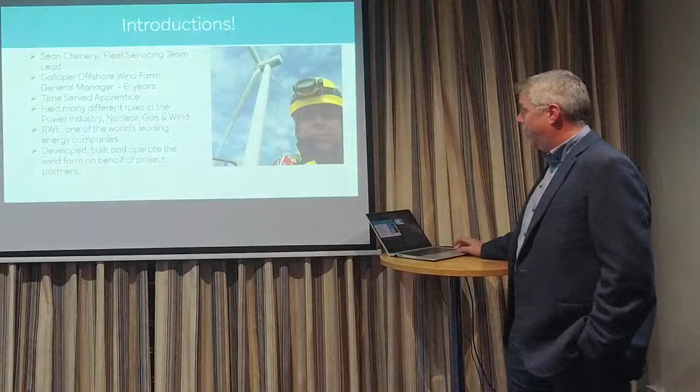Good evening, everybody. As introduced, my name's Sean Chenery. I lead a team for RWE, the Fleet Servicing Team. That's a team that travels around multiple wind farms via a large boat, and I service them wind farms. When Ian asked me to present here, he'd seen me at a previous one, I was actually the general manager at Galloper, but since then I've changed jobs. For the purpose of today, I'm still the general manager at Galloper Wind Farm, and I've been there for 6 years.

My background is engineering, so I did a time-served apprenticeship at Sizewell A Power Station on the East Coast. I've worked in nuclear, gas, and wind, and I now work for RWE, which is one of the world's leading offshore wind installers, particularly in the UK and continental Europe. We develop, build, operate, and eventually will decommission offshore wind farms.

So today I'm going to talk you through a bit about offshore wind farms, what they are, why they're there. I'm hoping that will spark lots of questions as we go through, and I'll try to address some of the issues that previous groups have brought up with regards to navigation.

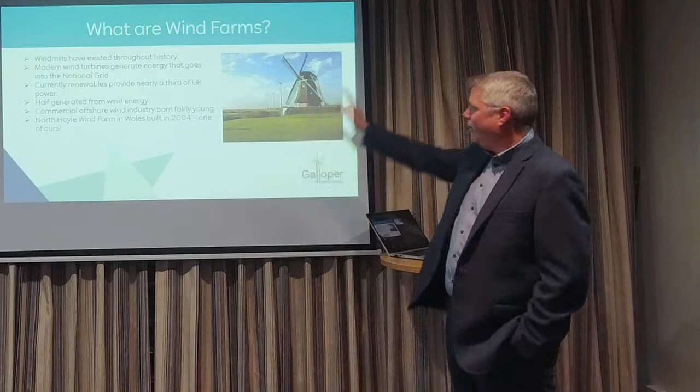So windmills, you mentioned windmills. I don't like to call them windmills. They make flour, I make power. They've existed for a long time, but the modern ones are set at sea, onshore as well.

We don't currently do onshore in my team, but we've got onshore wind farms as well, all connected to the national grid. I was talking to one of your colleagues earlier - historically, the national grid was set up with a spine down the UK, where most of the big coal-fired power stations sat, where the coal was, in the Midlands, connected to the national grid. They've all shut, apart from a few that are now burning biomass. Now we're connecting everything on the outside, coming from the North Sea and the Irish Sea, connecting to the outside, which has caused a bit of a headache for the national grid. So not only are we building our wind farms offshore, they've now got to change their network to facilitate power coming in from the extremities rather than the central spine.

Renewables make up about a third of the UK's generation at the moment. This was last year at this presentation, it's now more than that - more than a third of our generation comes from renewables, and half of that is from offshore wind. And that part is growing rapidly. You'll hear in the news today about another wind farm coming on, it's growing rapidly.

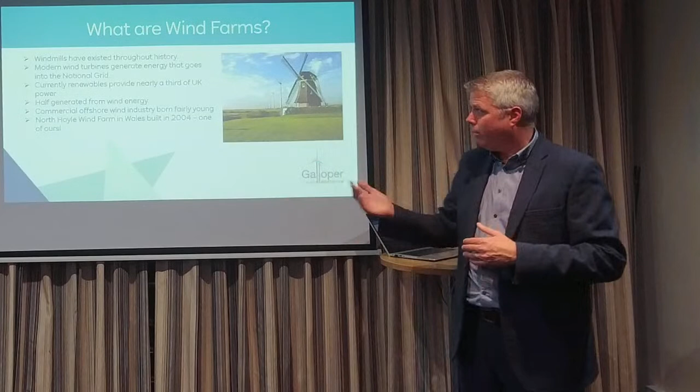The first commercial offshore wind farm for RWE was in North Wales, built in 2004. So you can see that's the very first one, and where we've come now, how many wind farms we've got. This industry has rapidly grown in the last 10 to 15 years.

Just a bit of stats - this is 2022, the next page is 23. But in the UK, the largest source of renewable energy was offshore wind. We broke records - this was a particular day in 2022, we were already 26% of UK generation, and coal had almost gone. The highest is still gas in the UK - the biggest generation in the UK is still coming from natural gas.

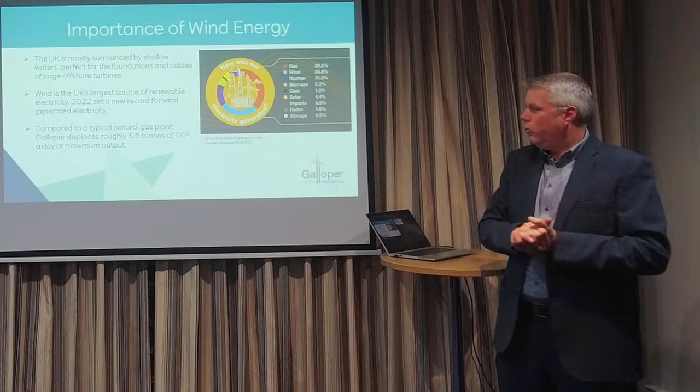Looking at our wind farm statistics - we're 353 megawatts from Galloper Wind Farm. If we had a gas-fired power station producing that power, our wind farm saves 3.5 tons of CO2 every day by displacing a gas-fired power station. So you can see that we're helping to clean up the environment. This is now 2023, so going forward a year.

Gas is still about a third, so it went from 38 to 30%. Offshore wind is now 33%. So in one year, we've increased by about 10% in the UK of our generation from offshore wind.

We're expecting that's a year-on-year 10% increase every year. By 2030, we should have 50 gigawatts of installed capacity. The UK uses about 40 gigawatts of power every day, so by 2030 we should be able to power the whole of the UK. Of course, wind doesn't blow every day, but it's a massive step forward to have enough installed capacity to produce all of our power in the UK by offshore wind by 2030.

A little bit about Galloper Wind Farm. We are 27 kilometres offshore. Around 380,000 homes are powered by just that one wind farm. We've got 56 turbines out there, which can power around 400,000 homes on any given day should the wind blow. We've got two export cables connecting all the turbines together, and they come ashore near Sizewell, connecting to the national grid. The water depths out there are 27 metres at the shallowest point and 36 metres at the deepest.

No, these are all steel, not concrete. There are concrete foundations elsewhere, like London Array, which uses concrete foundations, but ours are all steel. The later design turbines now being built on Dogger Bank and various other places are 15 metres in diameter, and water depths we're working in are typically up to a maximum of about 50 metres at the moment.

Much beyond 50 metres, we have to go to floating foundations. I'm not an expert on those, but we're now working on projects not in Scotland, since we didn't win any of those, but in continental Europe and America. Our Gulf of Mexico project is over 150 metres of water depth. Basically it's either a concrete or steel structure that sits under the water, concrete floats, and then it's chained down to the seabed - tethered by long chains.

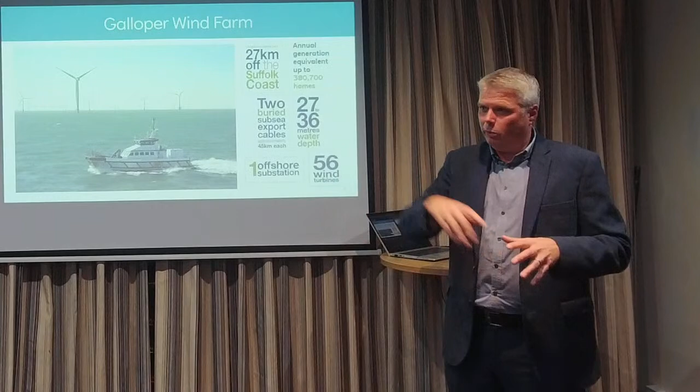But Galloper is what we call fixed bottom, a solid foundation hammered into the seabed. Before we install it, we find the location where we want to put the turbine, dump a load of rock on the seabed, and then hammer the foundation through the middle of the rock. The reason the rock's there is to stop scour. Since we're built on London clay and sand at Galloper, if we didn't put the rock down, within 5 years the sand would erode the foundation and we'd be replacing turbines.

A 5-year life is not long - no, we've got a 25-year life on it. So basically we go along, dump rock on the seabed, hammer the foundation through the middle, and then build the turbine on top.

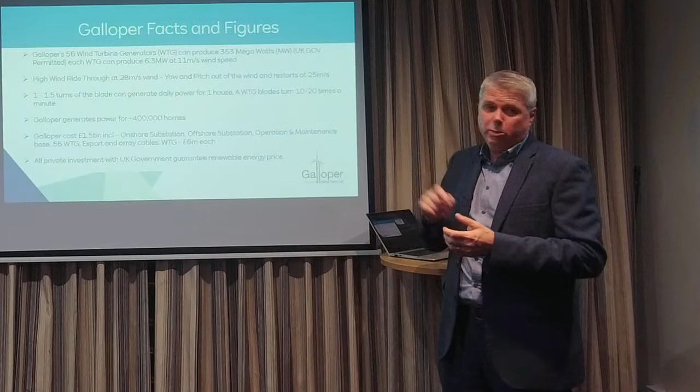We've got 56 turbines, 353 megawatts, producing 6.3 megawatts at 11 metres per second - that's the optimal speed for maximum generation. Each turbine runs all the way from 3 up to 27 metres per second, which is about 52 knots, and they can run up to 28.

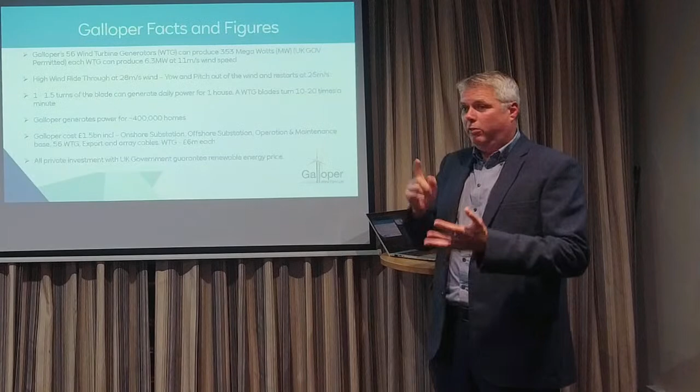At 28, the blades pitch so they're not catching the wind, and they turn themselves out of the wind. They do that automatically - they've got an anemometer on them, they figure out the wind speed, and sort themselves out. Some turbines are shielded by the one in front, so they don't get as much wind and don't need to stop and turn themselves.

Each blade revolution - so 1.5 revolutions of our blade - is enough to power a standard 4-bedroom house for a whole day.

So that's quite a lot - just 1.5 times that thing rotates around, that's enough power for a house for a day.

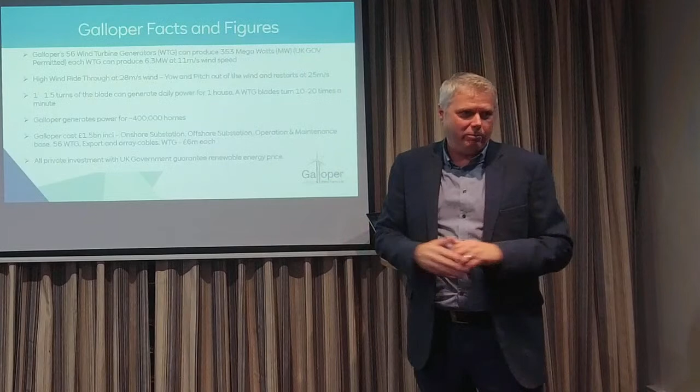The ones at Dogger Bank, I don't know if you guys saw it in the news, that was installed today. They're twice the size of ours - one revolution powers 2 houses for a day.

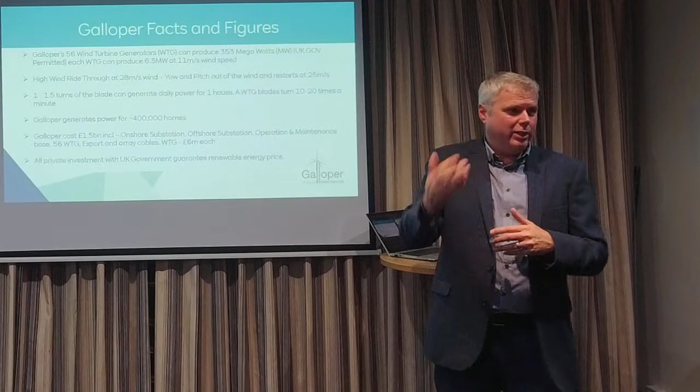So it's significant numbers. It cost us £1.5 billion to build our wind farm, quite a lot of money. We are debt financed - most wind farms built these days are either joint venture or debt financed, so they need this constant level of income to come in.

Of that £1.5 billion, each turbine costs around £6 million. Ours were made so the blades were made in Hull, the metal structure was made in Belgium, but the turbine itself was made in Denmark by Siemens.

Where are we? 27 kilometres offshore, straight out from Harwich. Our export cables come out the top of the wind farm and trundle up towards Sizewell.

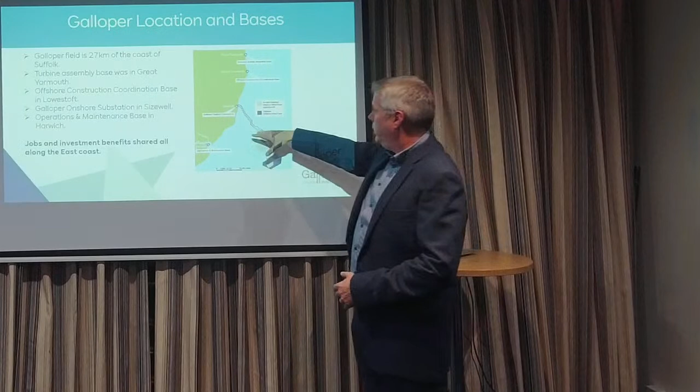When we built it, we had our construction centre in Lowestoft, and our turbines were assembled in Great Yarmouth. We ship all our parts there in bits - the turbine comes in lots of blades and they build them up on the quayside in Great Yarmouth. They stand them on the vessel, take it out and install 6 turbines at a time, taking 24 hours to build each turbine.

So just a bit around RWE as well - it's not just about Galloper. We've got a whole array of wind farms around the UK ourselves. All the green ones, you probably can't see them, represent our operational wind farms.

We're now working on Sofia, which is Dogger Bank. Those turbines are 15 megawatts, so twice the size of the ones we've got. Ours are, what, 180 metres to the tip - Sofia's are 280 to the tip.

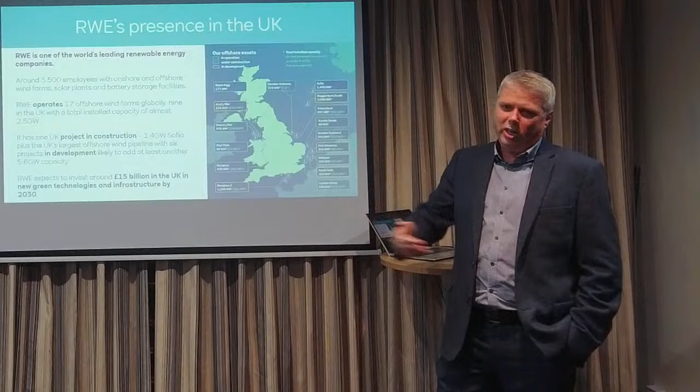The ones we're now looking at - 5 Estuaries, North Falls, the extension projects to Galloper - we're looking at 400 metre to the tip turbines, so 20 megawatt turbines. And also down at Rampion on the south coast - Rampion 1 is already off the coast of Brighton. We're looking at Rampion 2, an extension going south and west of Rampion, with similar size turbines, so 300, 350 metre turbines. You can see the advancement, the growth, the scale has just grown massively over the last 10 years.

So yeah, the one we're now working on is Sofia, the one we've just built was Triton Knoll. We're constantly building around the UK.

We expect to invest around £15 billion in the UK by 2030, and that's just RWE. You've got the big players like Ørsted and Vattenfall and Falck, all the other guys also pumping money into the UK. So lots of money.

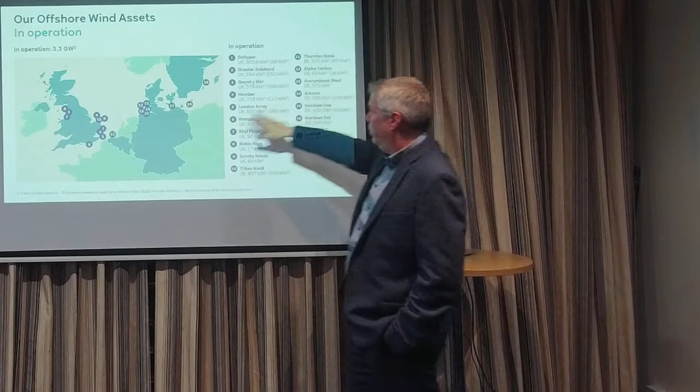It's not just about the UK - we've got all these wind farms in the UK, but we also operate wind farms in Germany, in the Baltic, mainly around Helgoland in Germany. We've got a couple of wind farms in Sweden and Denmark too, but that's our operational fleet. At the moment RWE is really focused on the UK and continental Europe.

We are now expanding into APAC and America as well - we've just won a number of auctions in America. America seems to be really galloping on the heels of the UK with regards to offshore wind.

These are the ones in development - we'll talk about the operational ones. So Rampion 2, for you guys, is on the south coast.

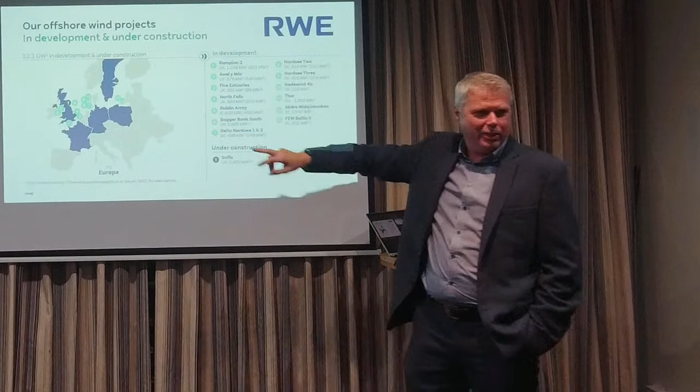Awel y Môr is in the Irish Sea. 5 Estuaries, North Falls are on the east coast. Dublin Array is going to be our first wind farm in Dublin. There's a place in Dublin where everybody has their wedding photo taken - our wind farm will be right behind it. It'd be lovely, just different.

So we're building in Dogger Bank as well - we're building Sofia at the moment. Dogger Bank South, just south of that, is going to be twice the size again, so 3,000 megawatts. And then we've got a whole load in Germany and Denmark that we're also building at the moment.

Thor is our next one in Denmark that we're now starting to build. So you can see there's a huge amount going on, lots of offshore wind coming for the future.

There's this wall of wind farms you're going to have to sail through. But there may be a misconception - you can sail through them, there is no exclusion around them. Gabbard, our first wind farm, when first built, the MMO gave us a 50-metre exclusion zone around every turbine. Galloper's come along, we've got no exclusion zone.

So all wind farms built now, you can sail right up to them. It's a good thing for fishermen, because if all of these were built and every single turbine had an exclusion zone, we'd be wiping out a huge percentage of available fishing ground. So fishermen sail right up to our turbines - in some cases they've got to put their red paint on my turbines. But yeah, they can sail right up to the turbines.

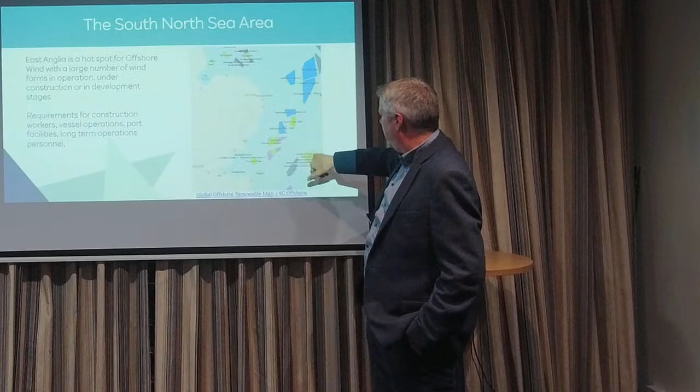You can see mainly on the east coast there's a huge expansion. The blue ones are in development, the green ones are operational, and the pink ones further out are developments that have just been put on hold - there's issues around commercial gain from those wind farms, so they're on hold at this moment in time. Might be somebody in the room that knows about those.

So these are North Falls. North Falls is this purple bit on the inside of Greater Gabbard, and that's where we're trying to extend. These are just two extensions to the existing - these two are the existing, and these are the two extensions. We're looking to double what we've got - double Gabbard into here, and double Galloper.

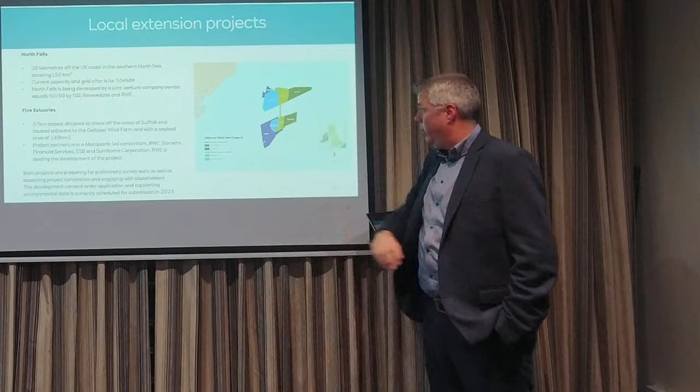Five estuaries - one of the things is this traffic separation scheme that runs right through the middle of our wind farm, so we're clearly not allowed to build in there. One thing we're having to consider is lots of shipping doesn't go through the traffic separation scheme - it comes around the top, and the natural shipping route is to cut this corner. So we're in discussions with lots of stakeholders around whether we can build out here or not, because apparently it's going to cost them billions to go further around, and maybe there's compensation involved. But fundamentally, that's what we're doing at the moment - looking at where we can possibly build our future wind farms.

So what are the turbines? As I say, 6.3 megawatts, tip height 180 metres. We've got 56 turbines, made by Siemens Gamesa. The blades are fiberglass, the structure is steel. The bit on top that everything connects to is called the nacelle - that's made of fiberglass as well. The older turbines are made of steel; ours are made of fiberglass.

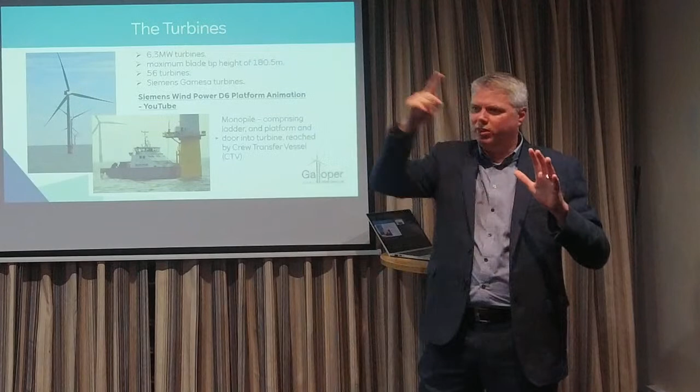It's a direct drive, so there's no gearbox, no big oil or anything in our turbine. These are the latest design. They're a permanent magnet generator, so there's no exciter or anything in there. There's 90 magnets - if you think about a normal generator that's got a north and south pole rotating at 3,000 RPM, these things rotate really slowly, but they've got multiple magnets in. Therefore you don't need an exciter or anything else, and you don't need a gearbox.

Previously, Greater Gabbard wind farm, 3.6 megawatts, has got a massive gearbox in it that takes the low speed of the blades through a high-speed shaft through a gearbox into a generator. The latest design does away with all of that, making them a lot more efficient with less maintenance. We only have to maintain these things once a year, so generally we go out to the wind farm once a year to do maintenance, if they're in the run.

So the monopile is this here - I talked about this steel tube being hammered into the seabed, so that gets hammered in. This was called a transition piece.

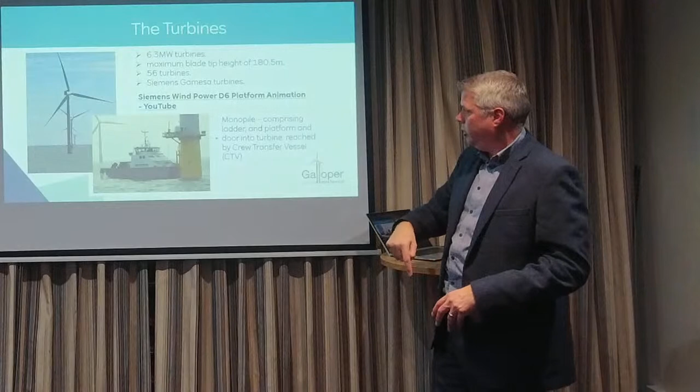This is then plopped on top and bolted on, so the monopile sits underneath this. That's bolted to the monopile, and then the tower, the white bit, is bolted onto the top. This has our boat landing.

So the vessel comes along, trundles out to the wind farm - I call it a very expensive taxi to get my techs to work. So they come along, this boat pushes on, there's a rubber fender on the front of the boat.

And as it pushes on the fender, it obviously does this - the rubber warms up and it just sticks. So the boat comes along, pushes full power basically, and it warms up, it sticks. And then the guys just step across and climb the ladder.

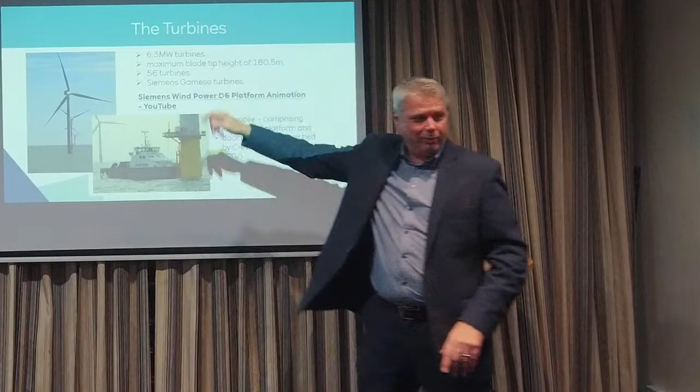There's a little bit more to it than that - there's a self-retracting line, so there's a safety line. They come up, grab the line, hook on, and then climb the ladder. The reason for that is if a rogue wave comes, it might not stick, so they're always hooked on as they do the transfer. It has been known on various different wind farms that this does let go every now and then.

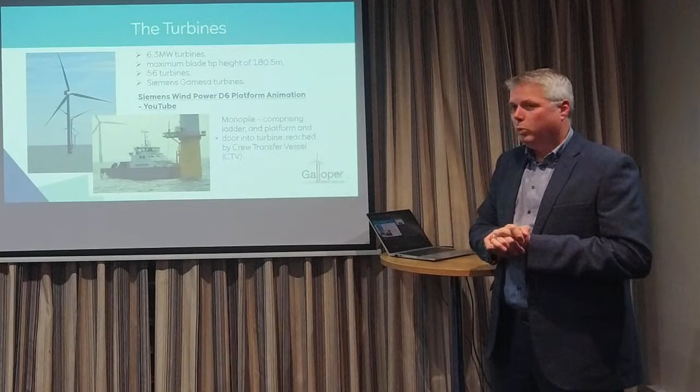These boats are capable of sticking to the turbine up to 1.7 metres significant wave height, so it has to be fairly rough for these things to fall off. Generally the technicians are being sick before we get there, before we want to transfer them. They've got about a 90-minute journey from Harwich to the wind farm every morning at about 24 knots, so on a rough day it's not very nice by the time you get there. But yeah, really capable vessels - we've got 3 of those at Galloper at the moment.

Talk about this - there's the nacelle. So this is the nacelle, it's got all the gubbins in it - electrical converters, hydraulics, and all the blades are pitched by hydraulic motors, and electrical motors yaw the whole thing. We've got 37 electrical motors that turn that thing round at the top.

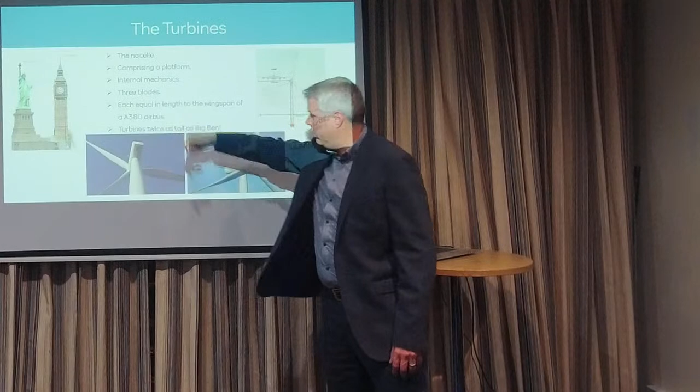All the equipment is lifted up through a little hatch under here. So when the guys go to maintain it, they climb up the monopile - there's a lift in here, takes about 3 minutes to get there in a lift, about 40 minutes if the lift's broken, because you've got to climb 100 metres on a ladder. Then when you get up there, they open this hatch, a little crane comes down, picks the equipment up off the TP, and then they take it up and maintain the turbine.

We originally had a helicopter at Galloper. After 2 years, we realised that the boats we use now are far more capable than we ever thought in the design. The cost of the helicopter, the helipad, and the training we need for our technicians just didn't outweigh or compensate for the fact the availability of the boats had got better. So after 2 years we ditched the helicopter because we can get to them by boat basically.

Quite clever technology - the blades we've just installed at Kaskasi, which is similar to this but 9 megawatts, our German wind farm off Helgoland, are recyclable blades. They're fiberglass, but made so they're fully recyclable. The polymer used to stick things together - you basically dump it in a bath full of chemicals, and it dissolves all the resin, and then you can reuse the fiberglass once you take it off. One of the biggest things about offshore wind, you've seen in the press, big fields in America where they're bulldozing fiberglass blades into landfill, but they're very different at Kaskasi with these recyclable blades.

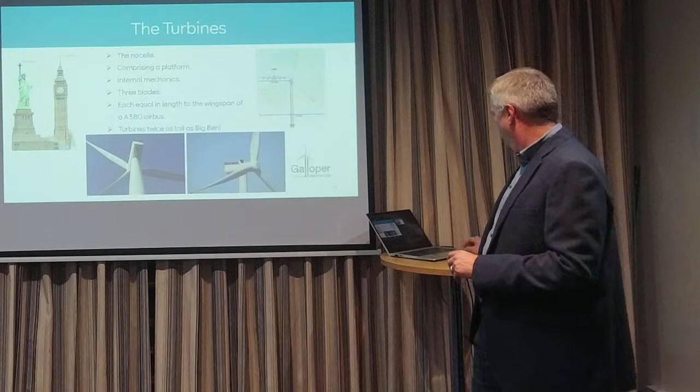Imagine the wind going down this way. I've talked to somebody about which side you should sail from the turbine - this side, don't get them stuck on the other side. Basically, we've designed the wind farm so they're not in straight lines anymore. London Array are in straight lines, but some of the later wind farms are designed so they're not. We look at the predominant wind direction and understand where that's going to come from.

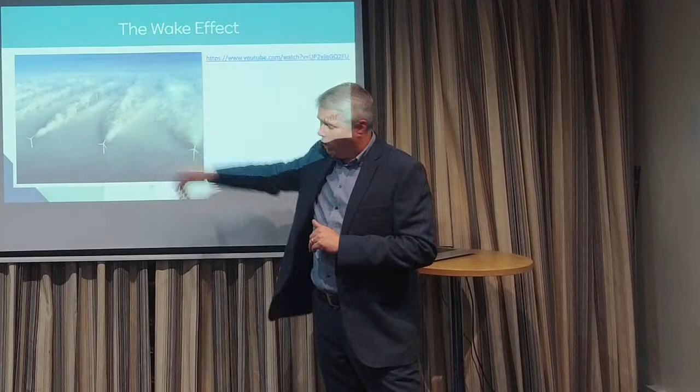This is a new piece of technology Siemens have come up with. These turbines are in straight lines, but they've got software that looks at the wind direction, looks at how much power this one is being starved by that one, and it will automatically yaw that one by 15 degrees. So the wind hits this and the wake goes over there, and the same up the line. It constantly looks at it and moves the wake of the turbine out of the way so it's not impacting the next turbine. You get about 15 to 20% more power on the wind farm just by putting this software on.

There's a sweet spot, because imagine you've got your turbine with these fiberglass blades, and the wind is trying to push it, and you're trying to divert that wind over to the next one. There's quite a lot of stress on the tower and on the blades, so there's a bit of a sweet spot on the angle you can try and move that wind.

Construction-wise, this was in Great Yarmouth, where we bring all these components in singularly. We put the towers together, fit them out, and do as much work on shore as we possibly can, because it's not hugely safe offshore - it's a lot safer to do it on terra firma. So we do all of that work on shore.

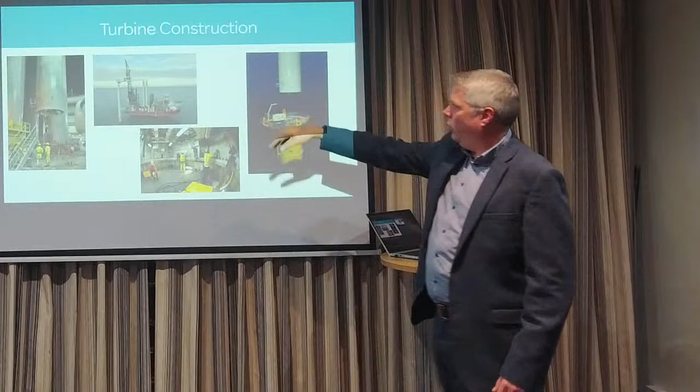It's got jack-up legs, so it sails out, puts these legs on the seabed, and lifts itself out. There's a stable platform, and then it uses this crane to grab hold of the equipment and put it on. We can build and commission a turbine in 24 hours. That thing comes along, jacks up on the seabed, puts the tower on, puts the nacelle on, puts the blades on, connects the cable, takes the jack-up away, moves off, commissions it, and goes to the next turbine. That's only made possible by doing all of this onshore.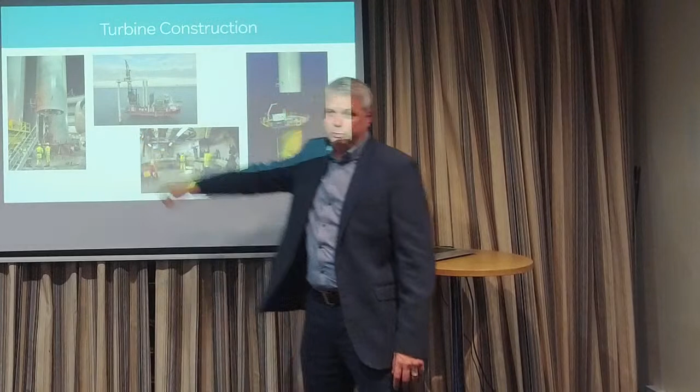This is the guys inside. This particular turbine has about 136 bolts around here, M48 I think, and they're basically torqued down as they go around. This doesn't stop at night - we do this 24 hours a day, and we've got very good crane operators from Siemens doing that.

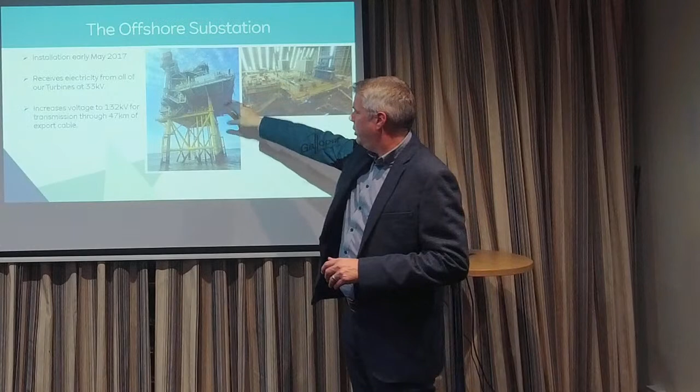So it's not just about turbines. We have an offshore substation, 1,600 tonnes, with 2 big transformers that take the power from 33,000 volts to 132,000 volts and send that to shore. All the cables that come from the turbines run up through these little tubes, and the ones on the far side are the bigger ones that take the export out.

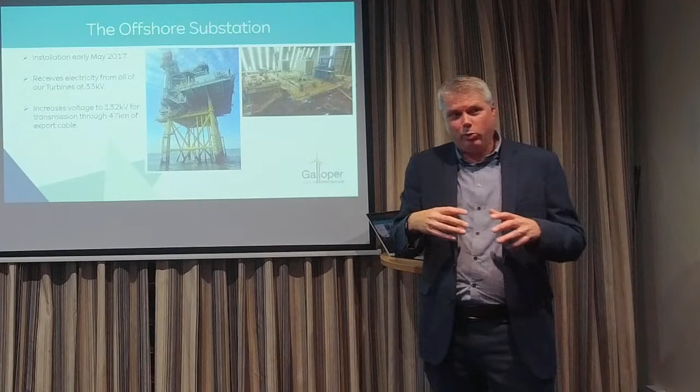We build this as a construction company, but as an operator we're not allowed to operate the transmission network as well. There's a process in the UK that doesn't exist in any other country, where you have to have a second party that runs the transmission system - called an OFTO in the UK. So you build it, commission it, then sell it to somebody else to operate for the next 25 years. That takes the power from the turbines, steps it up to make it more efficient, sends it down those cables and connects it to Leiston.

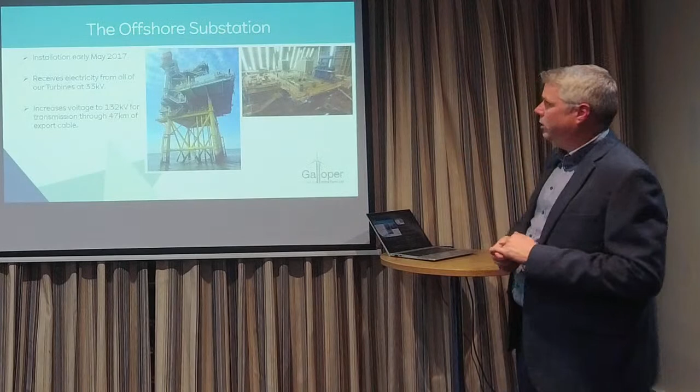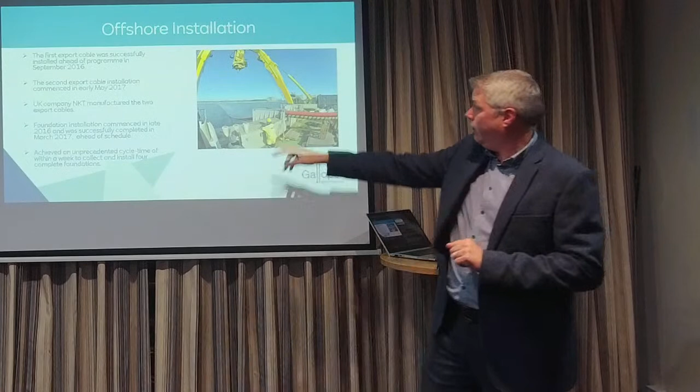This is our cable vessel - we pull 2 export cables in, one one summer and one the next. This boat has a big carousel with the cable on it, that's the stripy bit. It reverses as far as it can towards the sea, then a little tug takes a plough on the back, trundles it, and dumps it on the beach. You then put the cable in it, and the boat pulls that plough and ploughs the cable into the seabed 2 metres deep.

So my life is not about generation, my life's about logistics - when I can get a boat out there, when I get people out there, do I get the right tools. It's generally not about the generation side of the business.

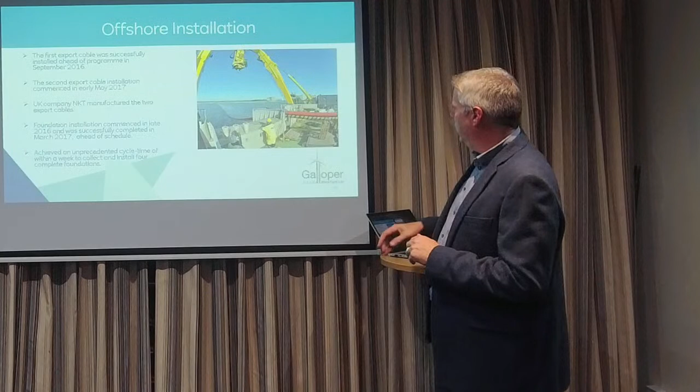Bearing in mind we want to look after the environment and visual impact, so we dug a big hole and all the spoil we created we put on the berm. So if you ever go to Sizewell Beach - hardly anyone does - you'll never be able to see this because we sort of buried it in the environment. And we've got lots of equipment there that takes the power and cleans it all up.

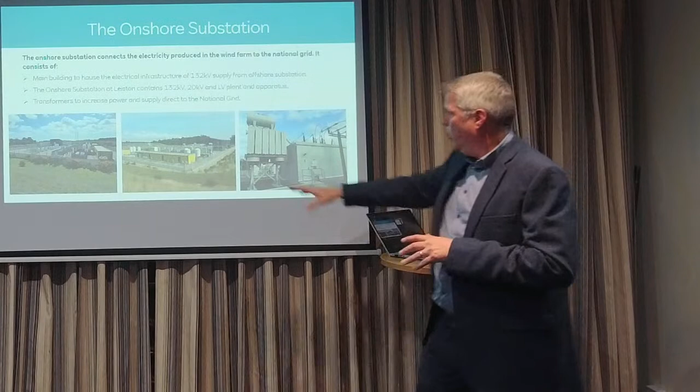Offshore wind, the power generated isn't particularly clean - it's got some harmonics associated with it. We've got lots of filtration and capacitors and reactor banks, cleaning all the power up before it's connected to the national grid. So basically in this building is where it connects to the national grid, but all of the stuff outside is cleaning and filtering the electricity to make sure it's good enough to connect to the national grid.

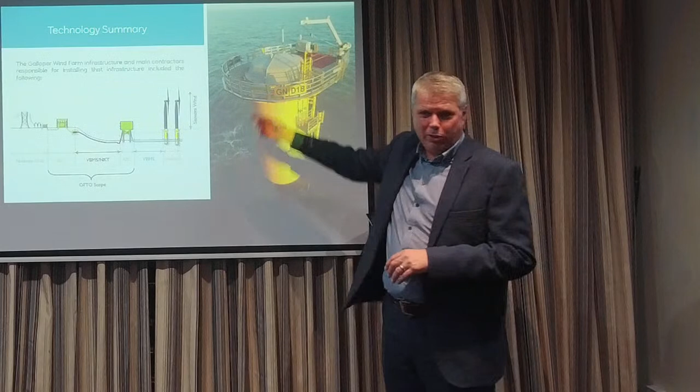So fundamentally that's what it is. There's the monopile on, so Galloper North, Delta 1 Bravo. So if you see GN, that's our north field. We've got Galloper South, and GS is the one below the separation scheme. Each wind farm will have exactly the same thing, so if you're ever lost and you look at the numbers, hopefully you should be able to see where you are, as long as you know what the number means.

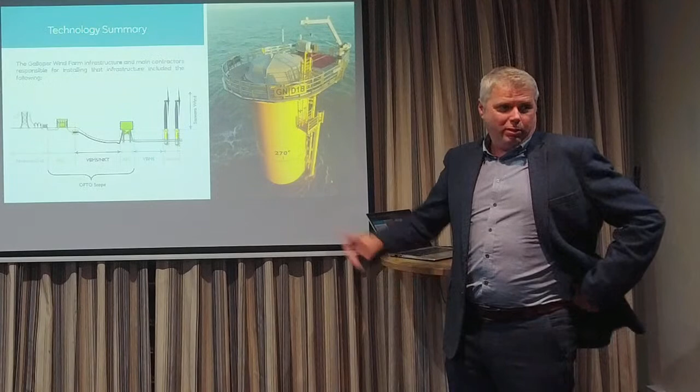And all of these point to, on the side of all our turbines, it tells you where the cables are. So on ours, if you sail up to it and you've got Alpha 1 Alpha to Bravo, Delta 1 Bravo, that means exactly where that line is, where the cable comes at the bottom and goes off to the other turbine. All the latest wind farms are doing that now - they never used to, but that's great for other people, fishermen and all that, to know exactly where the cable's coming up the turbine.

It's buried though, isn't it? It's buried 2 metres. I'll show you later on - there's a bit of a problem with that.

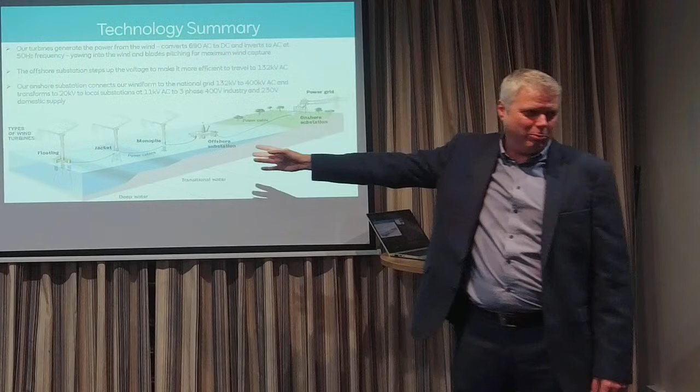So this is - oh, I like it, nice little picture. So we use monopiles, so we're in relatively shallow water, say up to 50 metres. 50 metres to about 75 metres is jacket foundations. And then when I talk floating foundations on the far left, that's when you get really deep water and you can't put that steel structure into the seabed. That's a pretty good picture of everything.

We've got an O&M base in Harwich, a state-of-the-art facility. I've got 60 odd people working in here. We've got pontoons, so a purpose-built pontoon, with 3 vessels.

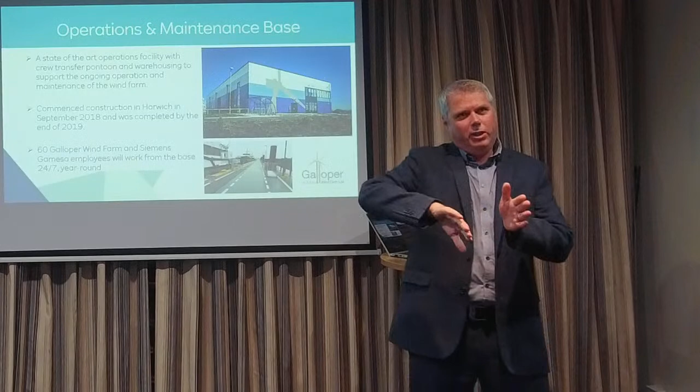So the wind farm actually got built before this because of brent geese. Harwich has got, so where we are positioned in Harwich, we've got a triple SI that side and an SPA that side, so we had to do lots of bird surveys. One of the reasons the helicopter was a problem is I couldn't have a helicopter at Harwich - I had to then use an airfield at Great Oakley because of, I forget what bird it was. It wasn't a bird actually, I can't remember what it was.

But it's not just the wind farm that we have to worry about for the environment, it's the O&M base and everything else that goes associated with it. We've got 60 people working in this location.

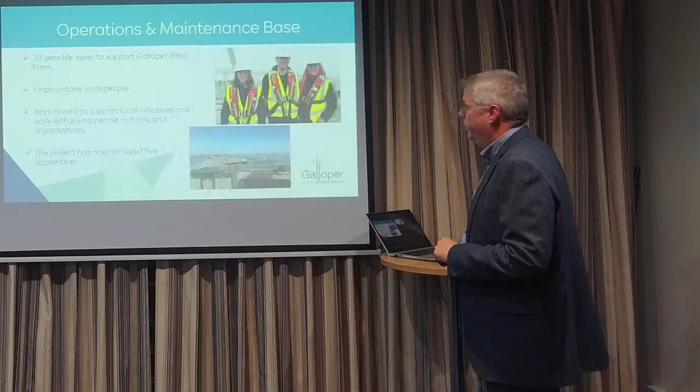We're there for a 23-year life. We employ lots of people - these are our apprentices in their first year. We've now had 7 or 8 apprentices go through the scheme at Harwich. This is our pontoon, our link span. We've got 80% of our employees living within an hour of Harwich or employed within an hour of Harwich. And like I say, we've got this massive apprenticeship scheme that we take people on as well.

RWE takes on 18 apprentices every year across the whole of the UK, and that's only getting bigger. We can't get enough, basically. And we've got graduate schemes and all the other schemes that you'd expect us to have.

Like I say, 90 minutes from Harwich on our boat. This is a guy who's got off here, basically climbed up. There's a self-retracting line there, so as he gets to the front, he grabs the self-retracting line, hooks himself on, climbs up here, goes over, and then gets to work.

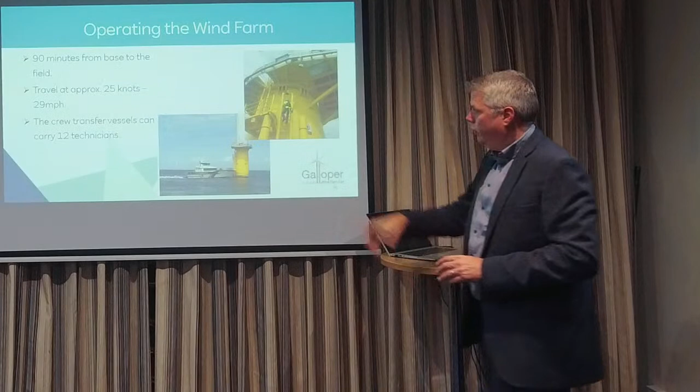The vessels are catamarans, jet boats or CPP, two different types. Jet boats are more manoeuvrable, but tend to fall off the turbines a little bit easier. Propeller boats are less manoeuvrable, but once they're on, they seem to have a better stick onto the boat in front. Each one takes 12 technicians. We've just procured a boat at Galloper to take 24, so these are generally 24 metres by 8.

The new best vessel is in build at the moment on the Isle of Wight. It's 27 metres long and 10 metres wide. So they're getting quite big, these boats, and quite expensive. What do we do to the wind farm? I've got some more pictures of this in a minute, but we've got people hanging on blades.

We're in a harsh environment - wind, rain, snow, ice, birds, everything else thrown at these blades - and lightning is our big issue. We've had a huge amount of lightning this year. So in the winter we can't get to it because of the wave height, and in the summer we can't get to it because there's loads of lightning. So we always need people to go and repair them.

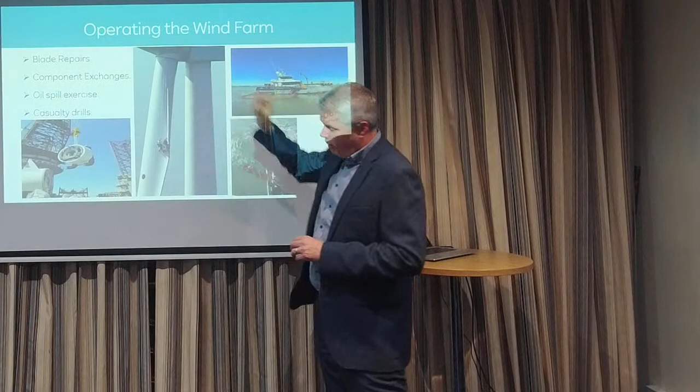We do all of our inspections by drone. We can get around the wind farm in a week, basically - every blade inspected within an inch of its life, photographed in the database, all remotely. Nobody goes on a blade. In basically a week we can do that. Then when we get those pictures back, we look at them and decide what needs repairing. Fundamentally we have to send somebody out on a rope to repair it - we haven't figured out how to repair them remotely yet.

Just a picture of us doing some exercises. Every 3 months we have to do spill exercises and casualty evacuation. So this stretcher has just come down from the hole at the back here - there isn't a person in there, no, that's a dummy. But you can imagine, in some places in the wind farm we're circa 2 hours away from medical care.

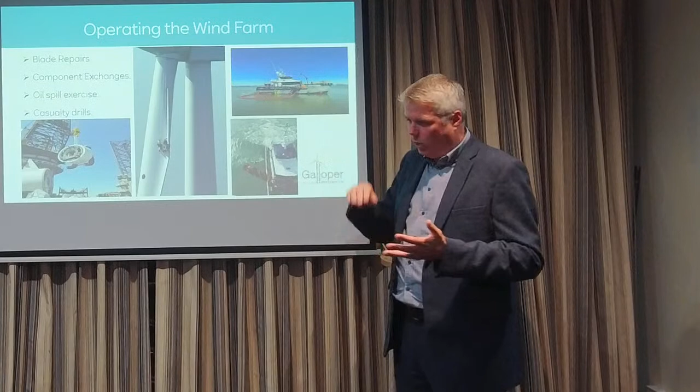So all of our technicians are, we call it, Eureka trained - they're all the highest training you can get below being a sort of paramedic. So they can all administer pain relief and all of that stuff, because we're a long way offshore.

This is our own base, so we've got a 24-hour control room where we do all the marine management. Should something happen in that wind farm in the middle of the night, we're all in there, and those guys will take charge of the situation, communicate with the harbour master, communicate with the Coast Guard, and manage those incidents. So there's always somebody there 24 hours a day.

And I'm speeding up because I'm on that side. Just a few more pictures of some of the drills that we do. This is on the offshore platform, man overboard stuff.

This is inside the turbine, so you can't see it here. Basically inside the turbine, we have to get somebody on a stretcher, get them out of their area, and there's a hatch on the side. Send them out of the hatch, then lower them down onto the TP, and then lower them off the TP onto the vessel, as we have done there. So they practice this every 3 months, and we do a drill every year with the RNLI.

Some of the damage we've seen on the blade - this was a lightning strike. That is the lightning receptor, so that worked really well, didn't it? In every blade there's a lightning receptor that's connected back to try and avoid this. But basically we've had a massive lightning strike there, and also here, so we'll have to go out and do a repair on that.

We generally have to get out there within 12 months, because this is fiberglass with wood underneath - basically balsa wood underneath that fiberglass. So if you leave that for any length of time, it starts to rot the wood underneath. So it's really important to get out and do those repairs.

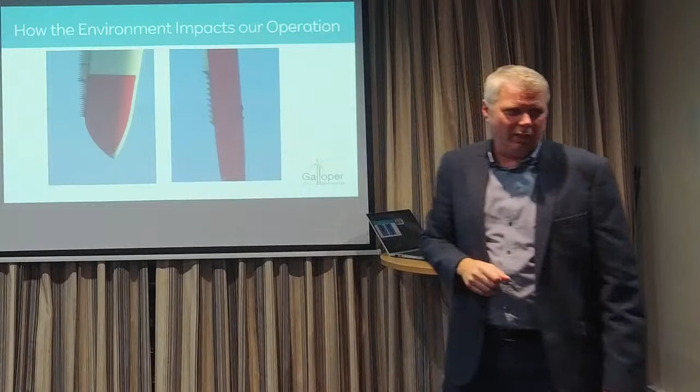And that repair looks like: the bloke hanging on the rope grinds it down, fills it in, cleans it up. They've all got these little marks to say which blade they're on, who's done it, how many coatings they've put on it, and then paint it red when you finish, not leave it white.

So this happened 2 weeks ago. The generator, which is this bit here, this bit in here, the circular bit behind - so this is the hub. The generator sits in here. We had a failure, so it's 5 years old.

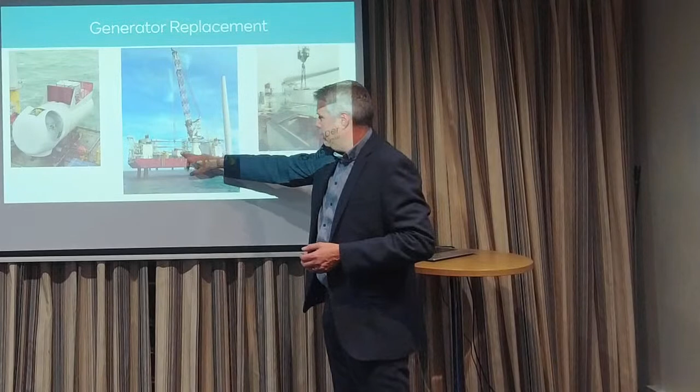The generator failed - basically we've got a little grease in the generator. So we had to bring a vessel in to take it off. This vessel comes in, jacks up beside the turbine, lifts the nacelle off the top, just unbolts it, drops it onto the deck of the vessel. They then take the hub off the front, then take the generator off and put it in here, refurbish the generator, and then reassemble back up again.

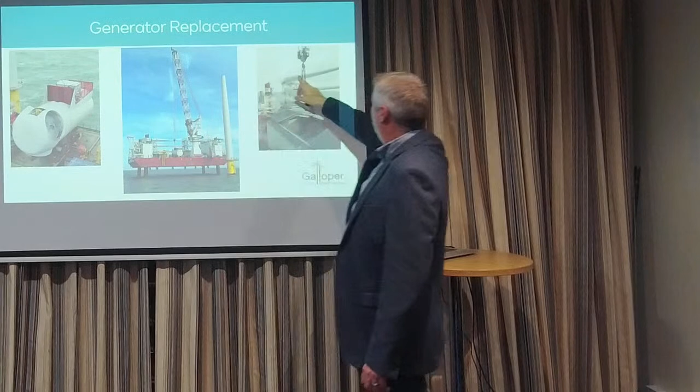So that was about 5 days' work, from legs in the seabed to back generating again. The blades, were they taken off first? Yeah, take the blades off first. So basically you can't see here - so you take the blades off. This is where the blades go on. So you unbolt the blades and put them on this rack. Take the nacelle off, then disassemble it.

And there's got this little hut on there because it has to be clean conditions when they're stripping that generator apart and putting it back together again. So they do break, but it's not common. When you go and change a generator - I've worked in power stations - you have a problem with a generator on a power station, chuck a load of people at it, bring a lorry in. There's only a few of these in the world that will actually do it. So we've been waiting nearly 12 months for this, so that generator's been off for a while.

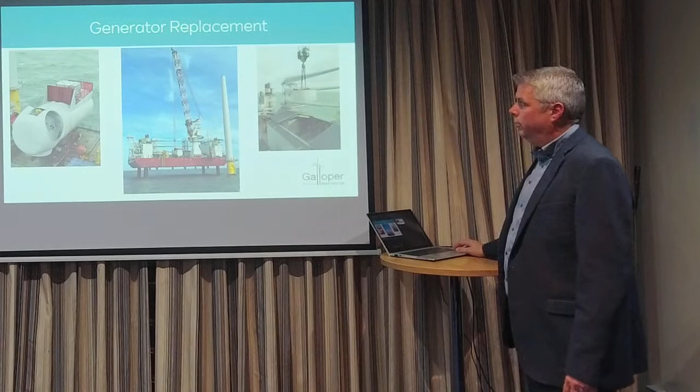Other problems - seabed. Talked about problems under the sea. So this is the turbine here, this is where the cable comes out. It's through this - like a plastic articulated cable protection system - and then it goes into a cast iron cable protection system, and it goes in the seabed and then it's buried. So just the end has got its protection system on.

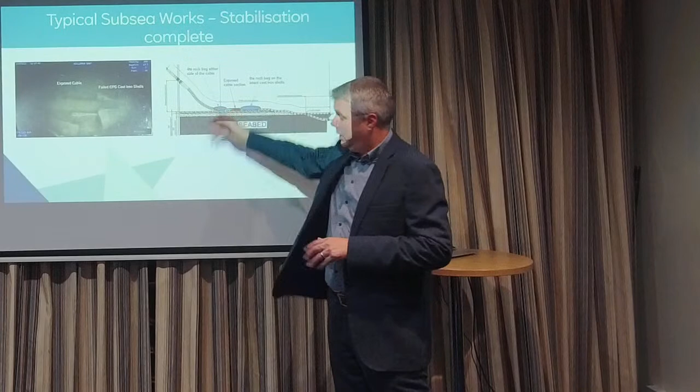What we've noted over the last 5 years is there's current that moves side to side. So this thing comes out and it's moving side to side on the seabed, and as it's moving side to side, it's rolling. So this thing rolls on the seabed and rolls back the other way. And with the tide it goes backwards and forwards, doing this all the time. So not only is it going side to side with the tide, but it's doing this constantly, and basically these cast iron things that hold it together, they're like little shells - they're falling apart.

They're rolling over, and remember I talked about this rock being dumped around it? So this is rock under here - this is the scour protection - and these things are rolling backwards and forwards over rock, and they've uncoupled themselves, and this is the exposed cable in here.

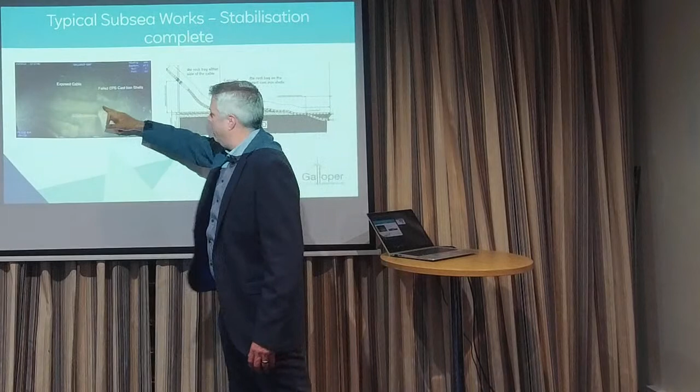So it's really tricky - you first go down, we do this every year, look at this. So we send our ROVs down to check. We've gone down and gone, oh, okay. So what we've had to do is design how we're going to stop it.

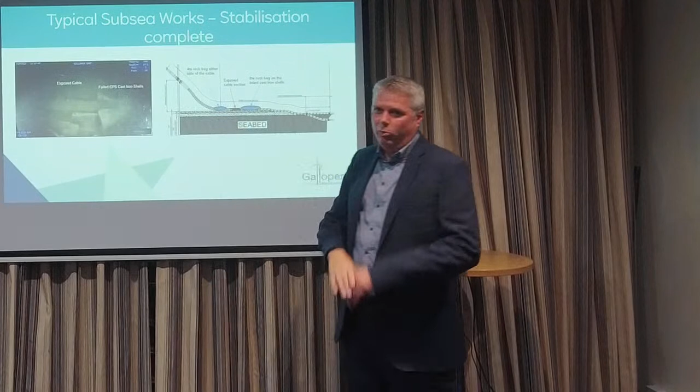So we've ended up putting a 4-ton rock bag either side of the cable, an 8-ton rock bag on the top, but you can't put it too close, because if you put it too close, this then becomes a hinge and it's going to snap there. So hundreds of engineering hours to figure out these two rock bags either side, to allow this far enough back to allow a little bit of movement, but not too much, to stop this unzipping completely, basically.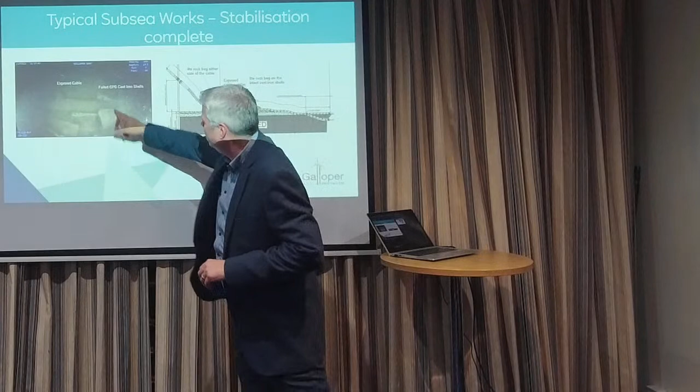Because if this unzips completely, the cable will just roll backwards and forwards - you can just about see it there, like the rock here. And that cable is only PVC cable wrapped in rope, and you'll see the rope has started - you can't see it on this photo, but the rope has started to come off, the sort of roving of that cable has started to come off. And we just finished this, so we ended up doing all 100 cable.

So we've got 56 turbines, cables linking turbine to turbine, so we've had to go and put rock bags down on all 100 locations. What else have we got a problem with? We mentioned how deep the cables are. This is monitoring a big sand wave that's running through our wind farm. We do surveys every 2 years using ROV, multi-beam echo sounder and side scan sonar.

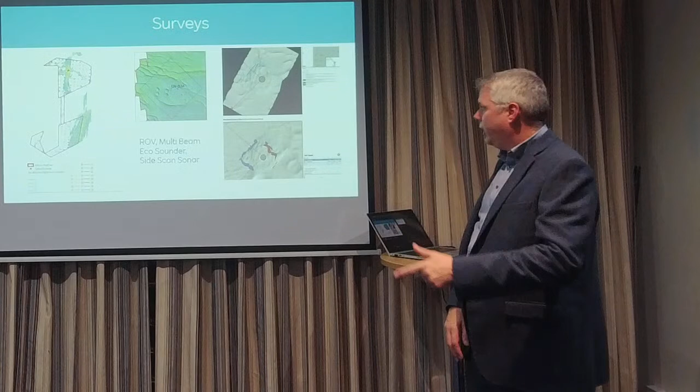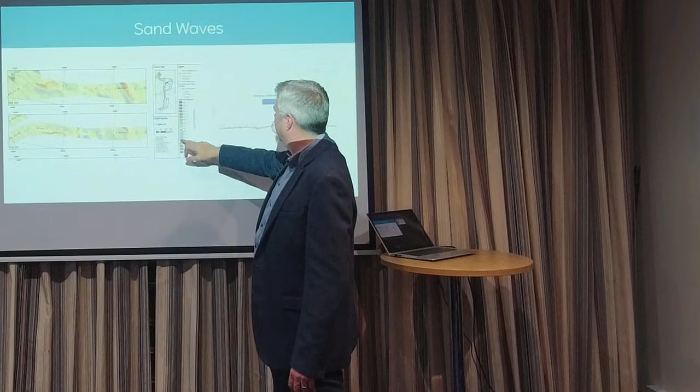So this is a turbine, you can see where the scour is around the turbine, the high spots and the low spots. But this is a sand wave running through the middle of our wind farm. I think I've got it on the next slide - yeah, so this is the direction of movement, and this is the height of the sand wave, between the low spot and the high spot. So we've got about 6 to 8 metre sand wave running through the wind farm, and we've buried our cables 2 metres deep.

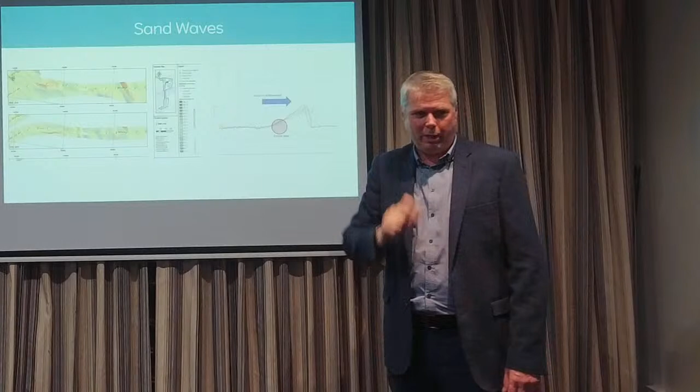So it's tough, but it's not an issue because the cables don't have to be buried, you just need to be careful where. Every year we do a survey, we update our charts for the fishermen so they know exactly where we've got exposed cable and where we haven't. Most of the wind farm is all buried, we just have to update them every year as this is moving. It's moving very slowly, but we update the charts every year just to make them aware of it. We didn't even know it was there - when we built the wind farm it was outside the wind farm, and now it's been coming through.

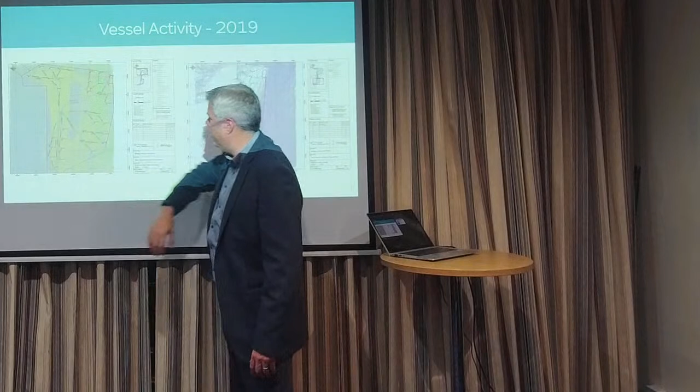This is just an image of how many vessels travel through a wind farm. This is 2019, this is the north of the wind farm, and all of these little lines are vessels that have transitioned through, mostly fishermen. Interestingly, this is the south - these are all vessels that have come round. I've never worked out to this day why they all go through the north and never through the south, but you rarely have anybody in the south of the wind farm. This is slightly shallower, the shallower part of the sandbank. We've got AIS tracking equipment that monitors every single boat that goes in, every single minute, within the wind farm - unless you're a fisherman, you turn it off.

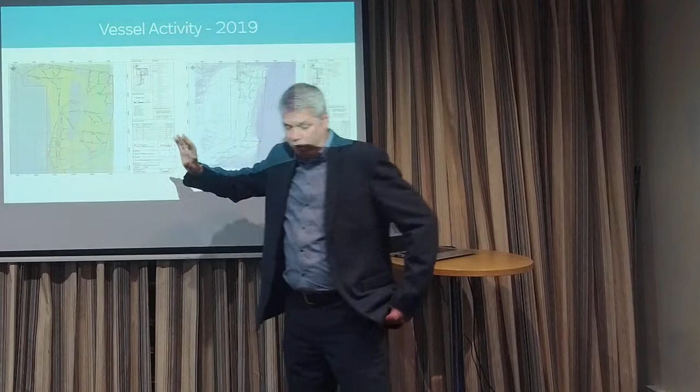Because we have got - and they're not on the map - a number of significant historic sites within the wind farm, and lots of wind farms have this. Funny enough, it's a corridor where some of the warplanes and ships that came back to the UK decided to dump stuff before they got back, and we found quite a lot. So when we build a wind farm, we do UXO surveys, and we will only intervene and move that UXO if it's within the area we're going to put a turbine. Sometimes we'll move our turbine because we don't want to deal with what's in the seabed. So there's a number of ordnance out there that we monitor and keep an eye on - some are moving through, they'll roll, so we need to keep an eye on them. There's also a number of other historic sites throughout the wind farm that we have to keep an eye on.

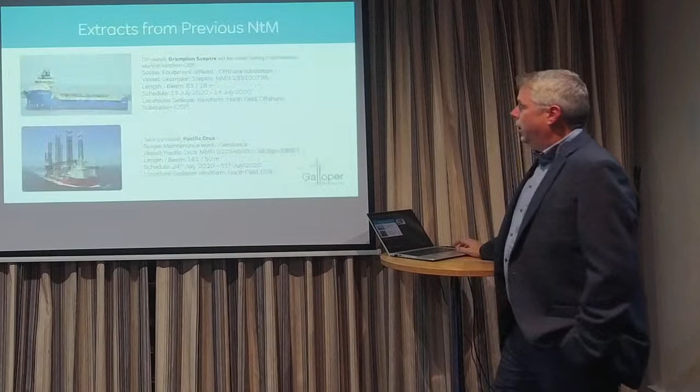We do notice to mariners, so whenever we bring a boat in - these are two of the boats we brought in, one for demobilising the OSP, this one for generator exchange - we always do a notice to mariner that goes out 14 days before we start the work. So you'll always have access to that, it's on the Kingfisher register as well. Whenever we have to do that work, we have to notify.

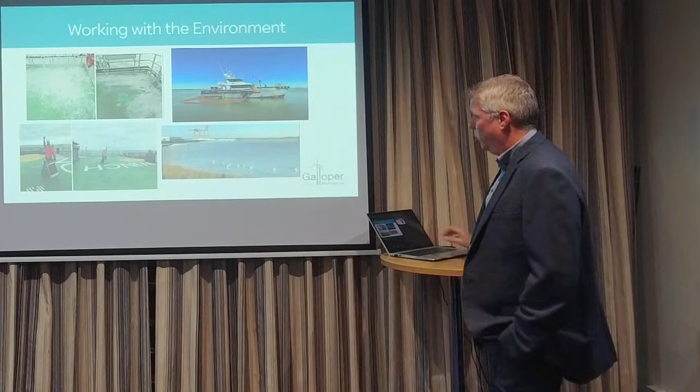I'm running late. So guano, big problem - I'm not going to talk about that, but yeah, we have to send our guys to work so everything needs to be cleaned. We have massive issues with guano off the east coast, as you can imagine.

Habitat - so we do pre-construction and post-construction benthic habitat surveys. We look at the seabed, look at grain structure, look at everything on that seabed before we start, then we look at it again once we've finished.

You'll see in the words there, it changed slightly between pre and post-construction, but was that due to the build of the wind farm, or was it seasonal? We didn't do the survey at the same time of year at the end. Basically, the construction hasn't massively changed the benthic habitat. One thing it does create is, with the monopiles in there, we get colonising crustaceans, and when we do the ROV surveys, thousands of starfish - God knows where they all come from. But we've got these habitats being built in the wind farms.

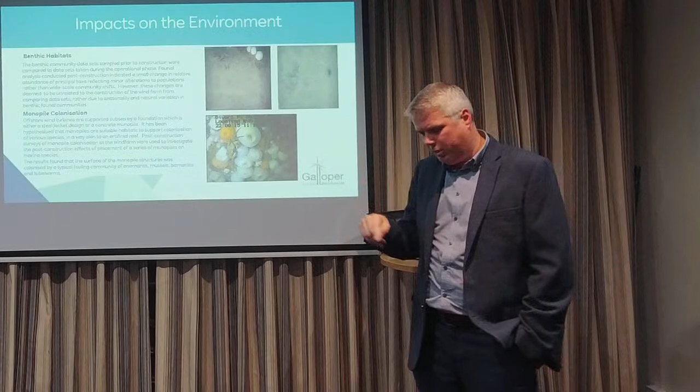The next biggest challenge the UK has is when we come to decommission these. The current thinking is everything out - when we get to the end of our life, rip the cables off the seabed, pull the monopiles out, leave it as it was before we got there. But we're now thinking, is that the right thing to do? You've built all this habitat, so why would you pull out something like 800 kilometres of cables within the wind farm that we need to remove? Why would you do that if you could just cut it off and leave it? On the flip side, if every wind farm just cut off and left what's there, the seabed's going to be cluttered, isn't it?

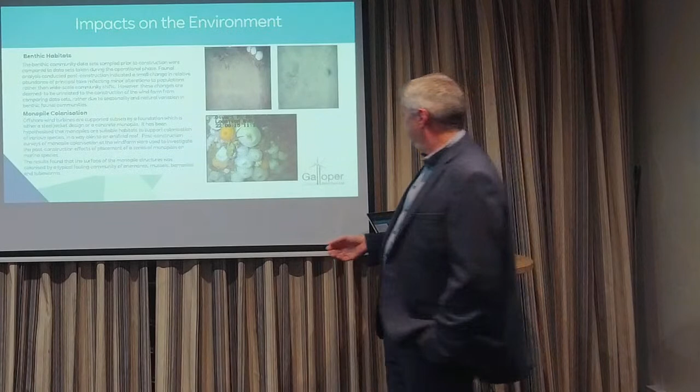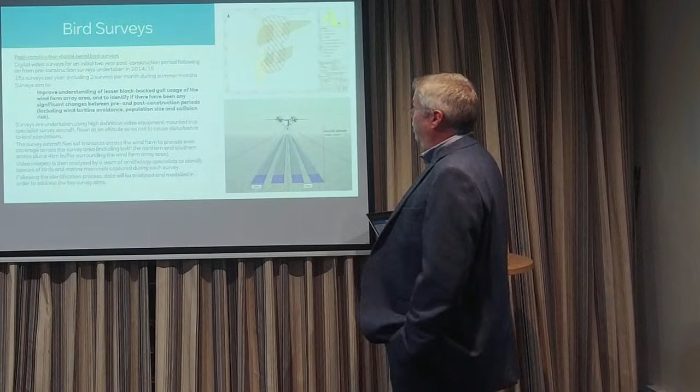We also do bird surveys all the way through. Before construction, we had to check on our birds, so we do bird surveys and tagging, to check that when we put the wind farm out, it hasn't changed what the birds fly into or don't fly into. The outcome is the wind farm hasn't impacted the lesser black-backed gulls - the migration routes hadn't changed from before the wind farm was built to after. We also track them on shore to see where they go once they leave the wind farm. We've finished that survey now and it's concluded the wind farm has had very little impact on the birds. There are also aerial surveys for the birds.

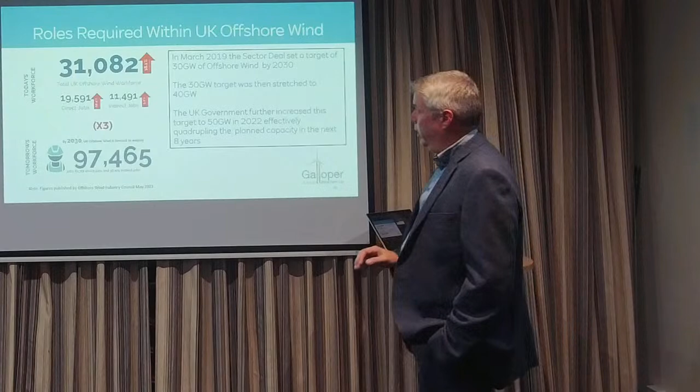Last slide, hopefully - that's where we were last year. That's the workforce in the UK, 31,000 people working in offshore wind. That's where we need to be by the end of the decade. So we've got a massive challenge because the growth is huge, but we need to get there by the end of the decade.